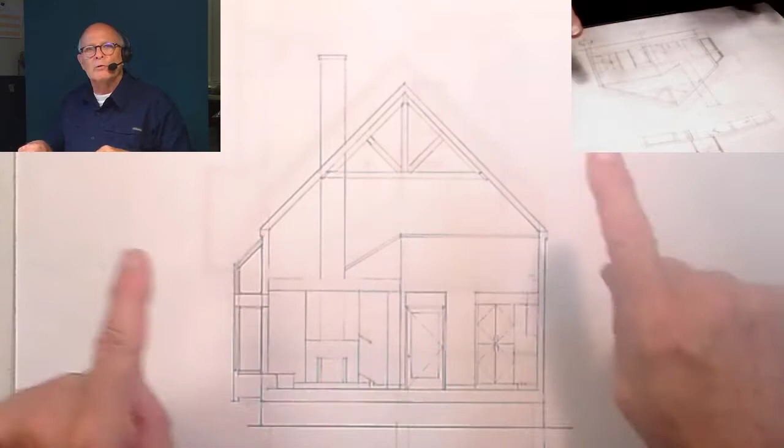So having said that, we're going to be using two drawings that we've already done. We're going to be working with the section and the 1/4 inch plan that we have already produced. And so this is, as mentioned, positive information that we need to use to complete the assignment. And simply bear in mind that these are orthographic projections and they are multi-view drawings. It takes multiple views of the same thing to describe the entire thing. So as a result, we're going to be using the section that we generated last week and the ground floor plan that we did the week before.

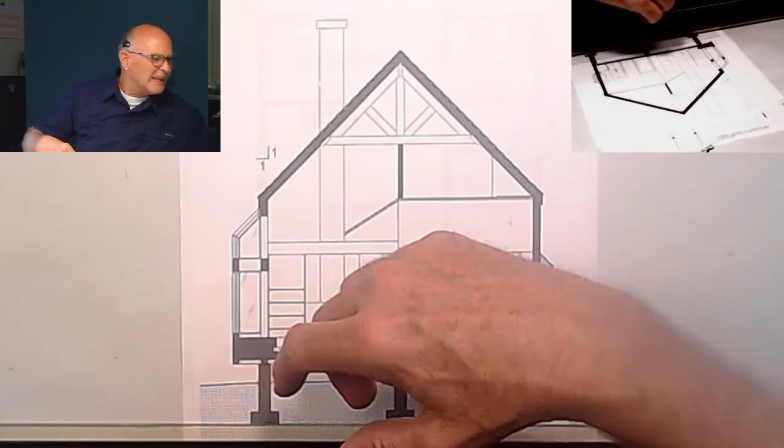So keep those available. Now for this exercise, I'm going to be using this because it's a little easier to see with the camera and so on. But one of the things I wanted you to observe is that in the setup that I have here, I have already placed my floor plan with this orientation. Now that orientation is that the solarium's on the left side and the porch is, obviously, here. The double windows are on the right. So make sure that you keep the correct orientation or you'll be drawing the wrong side, and you don't want to do that.

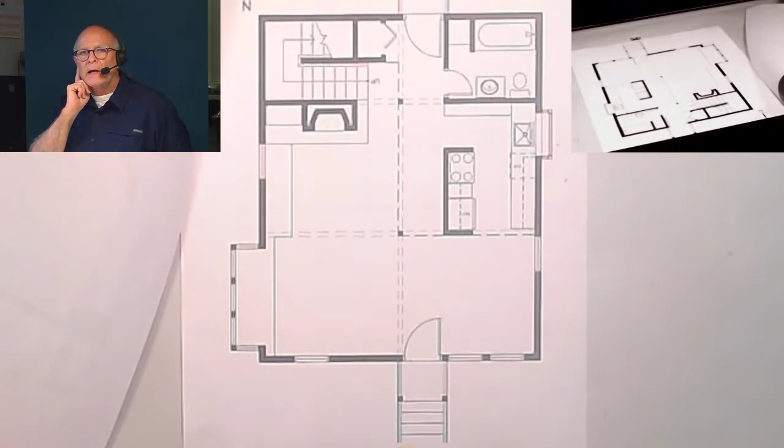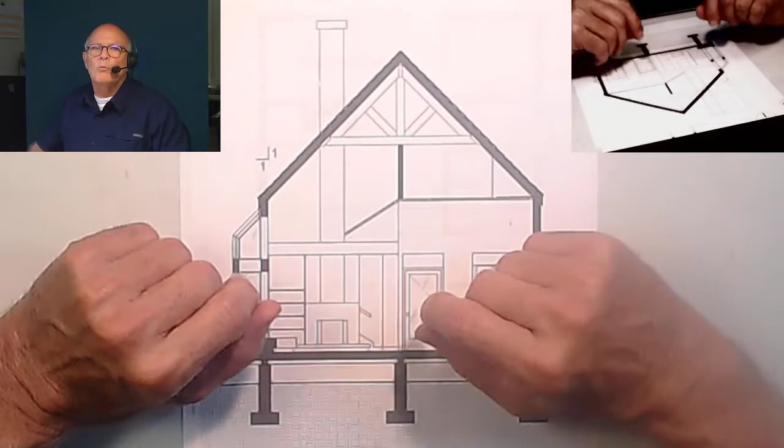So the other thing I want you to know is that based upon this information, we can start pretty readily with the concepts necessary for building an exterior elevation. And that is, we need the floor plan information to give us boundaries, left and right generally, and we need the section information to give us those heights. And with that, we can create kind of a building boundary line that defines the exterior profile of the building. And so that's one of the first things we do.

Then after that, we refer to each sheet very specifically for the features that have to do with its placement left and right off the plan, and the sections and the reference information here for the relative heights. And so that information comes from previously established information. So we're really just tooling information that we already have, and therefore we should be able to borrow that information and project it forward with these new drawings.

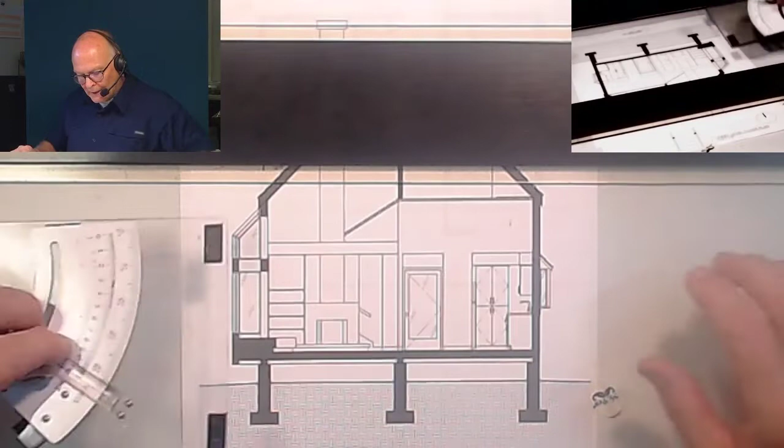So having said that, we want to use the section first. And so as we do that, please take a minute and, as I've done here, tape down the ground floor plan and then tape on top of it the section, making certain that the exterior lines line up with the exterior lines of the plan below. Okay, this should all be, again, a review or a continuation from last week, so nothing new here. So once you have those lined up, and I'm just going to check for square, I'm looking pretty good there. I'm going to say we're good, and I'm going to tape us down.

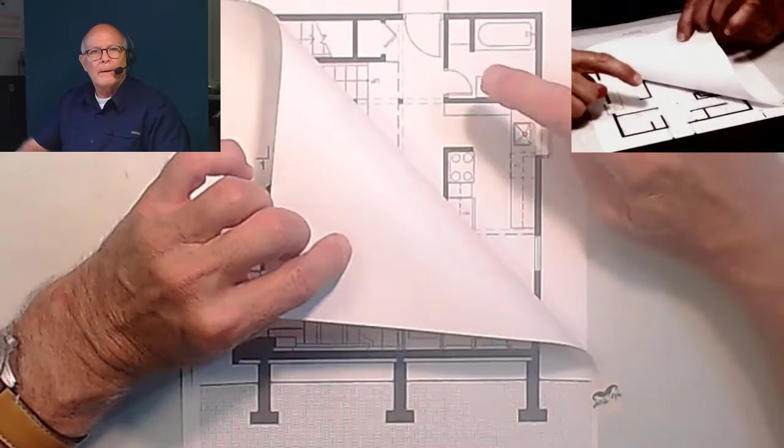Now, what that has provided us with is, if you look close, and you're going to have trouble seeing it there, but on your vellum it should be very readily apparent what is going on underneath because of the transparency of the media, the vellum drawing itself. So as a result, do think in terms of layers and referring back and forth to things. It's kind of helpful, but it takes a little practice. So good luck with that as we go about setting up the drawing.

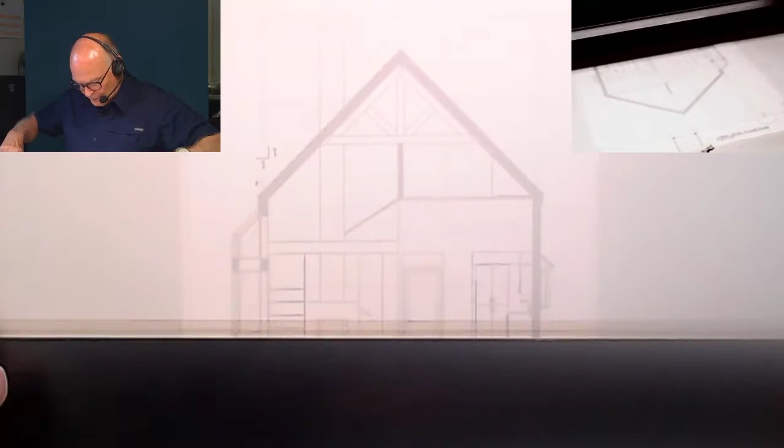Now, in this particular case, I'm going to set up the vellum sheet here so that my section is principally in the middle. Now remember, it's a rough out and you can finish it and make it look great later, but I don't want it drifting off the sheet too far. So I'm going to take time to make sure that it's dressed down and taped in the right location and that it's lined up properly so that the drawing will be easier to complete.

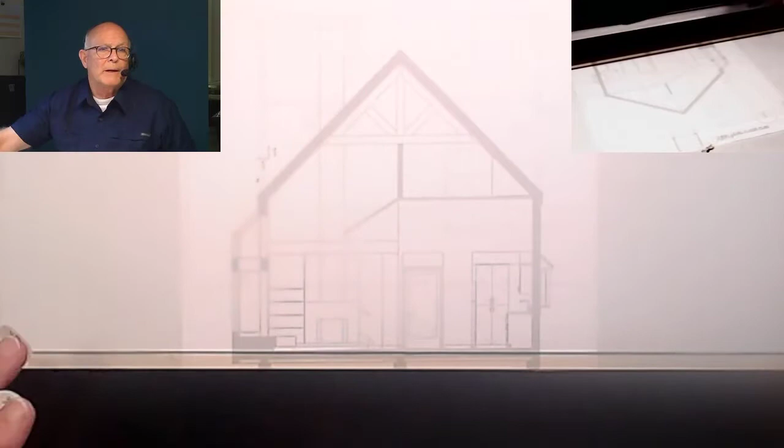Okay, so please take a minute and get yourself situated there, and I'm going to go ahead and start with some instructions here. The very first thing that we need to do is to establish those boundaries, like I said. And the great thing about the section you cut is that it automatically has given you a profile of one of the two elevations. So we're going to start there. Might as well start with the easy stuff and then see where it takes us from there.

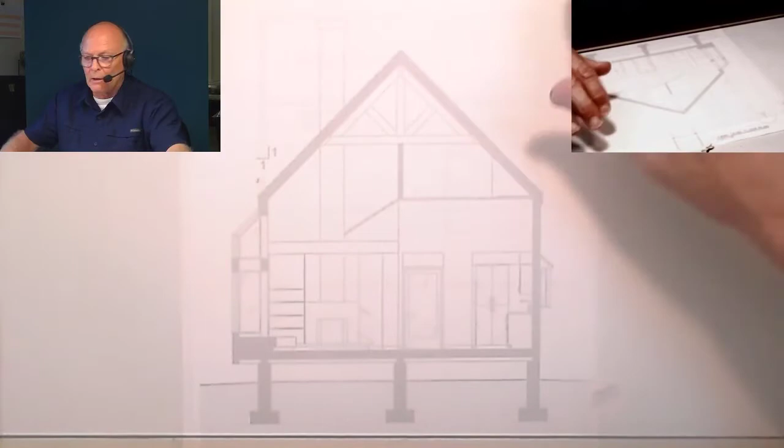So as we do that, the idea is that we have the section taped down. We're just going to trace the outline of it, okay? We don't want any of the inside lines. We can't see that. This is an exterior elevation, so really nothing inside the building will be visible, only exterior elements. So the easiest way to establish a boundary is simply just trace the profile of what you've got so far. So I'm going to do that quickly, so that you can see what we have to do here.

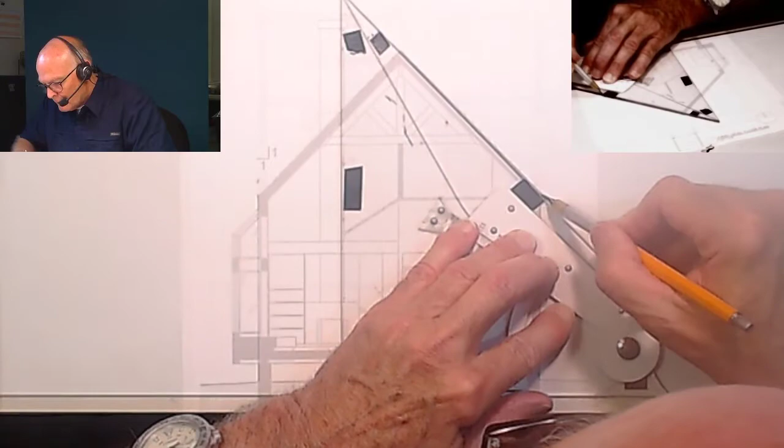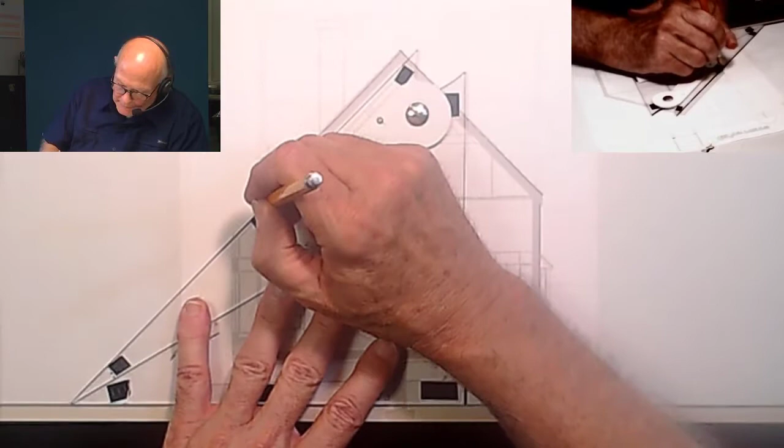And I'm going to do it rather light because you can do this. It's just not that technical. Okay, so I'm going to do this in such a way that you could see what it is we're aiming for here. Okay. And I'm going to go ahead and put in the profile of the solarium just for the time being. And then additionally, I'm going to go ahead and put in the ground line.

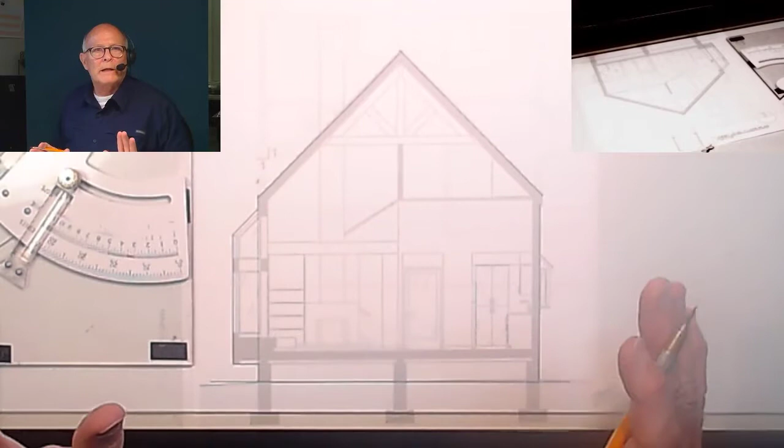Now, if you see my line's a little bit off here, it's because the copy underneath stretched. That happens when you run them through a photocopier machine. They're not a perfect copy. They tweak a little bit, but I know what I need to have here. And you're working off original work, so you shouldn't have that same problem. So as a result, we should be able to see pretty readily what's required for the profile of this building.

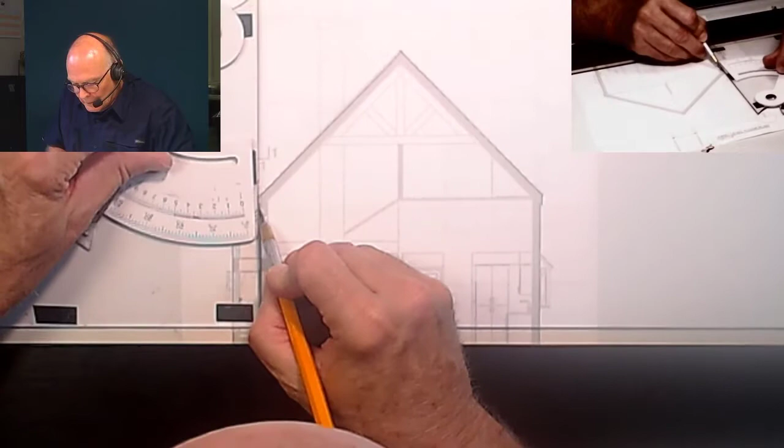And I think we're there. Okay, I didn't put in the chimney yet. We'll do that a little bit later. But you can see it's the basic house form. Instead of redrawing it and recalculating, going through all that stuff we did last week, we're relying on last week's work to provide us with this week's drawing. Now, the next drawing will be relying on this drawing to take us to the next drawing. But let's start with the idea that within this envelope that we've created, we have the basic form. And we could come back to this at any time.

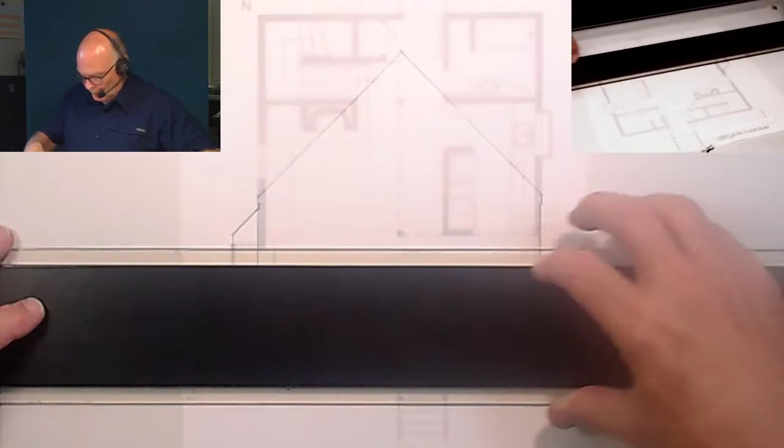At this stage of the game, I'm much more interested in what's going on with the plan below. Now, for that reason, I'm going to remove my section because it was there to give me a profile. That was really what I was trying to achieve with this. And for the next few minutes, I'm going to be relying much more heavily upon the floor plan and the reference sheet. So I'm going to pull that off and remove that. Oh, there's my floor plan. Okay, so hopefully you can see that much better. And the methodology we're going to talk about here is going to be repeatable in future lessons, not just this one, but down the road.

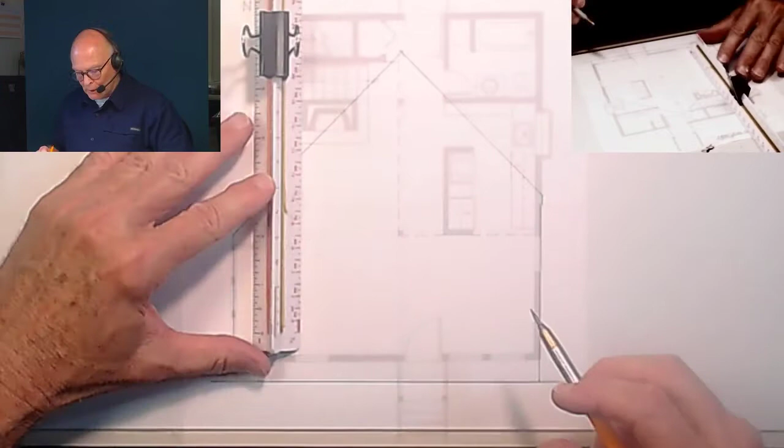So first thing I want you to understand is that we have the baseline. That's the outside. That's not the floor. If you remember, the floor is 3 feet above the ground line. So we're going to go ahead and mark that 1, 2, 3. And we're going to put in the finished floor line. That's important. The reason is all of our features will be measured from our information sheet, AFF, above finished floor. That means we're going to measure above the finished floor to find that height.

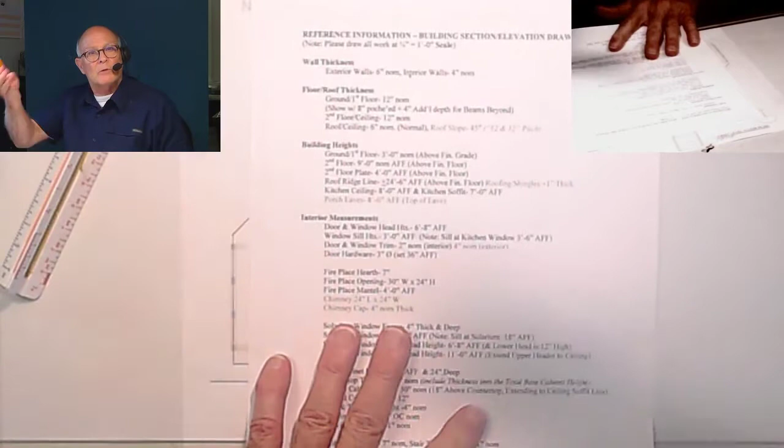So here's our building profile. Here's the lineup of the walls to it. So as you can see, we're on the outside of the wall, we're on the outside of the wall, and we're on the outside of the roof. We came down, put in the ground line, but this line right here is an interior measurement line, and it's going to help us stay consistent. I'm going to make a note. I'm going to write the letters FF on there so I don't forget, so I don't start drawing using the wrong measurement.

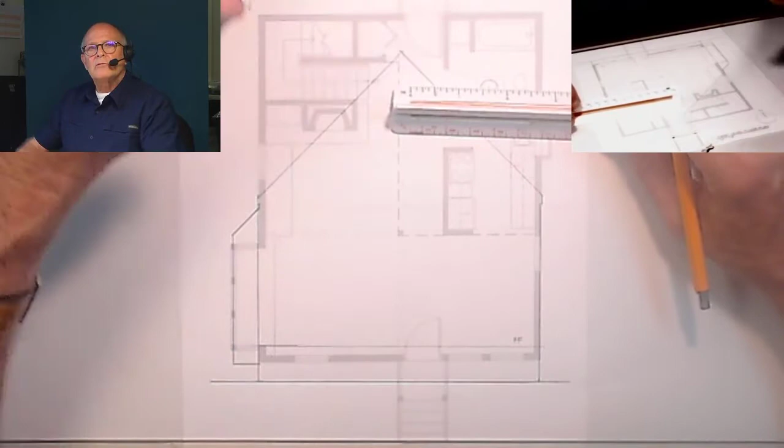Okay, so this part of the process is where we're going to use the information that's on the floor plan now, and we're going to transcribe it onto the elevation. It is relatively simple. What we're going to do is look for the major vertical edges or boundaries of those features that are required. So what do I mean by that? Let me point it out. Okay, so if we look at the plan down below, we say there's a window here, a door here, and a window here. Just those features on the front of the house. They're pretty important, so we're going to put them on the drawing first.

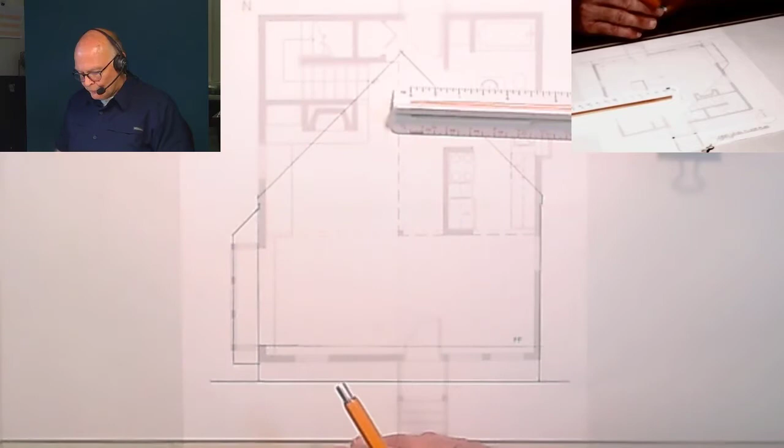So looking at the building boundaries or the building shell or perimeter, we've got a window, door, window. So we're going to find the edges of those. So if you look closely, we have an edge here, right at this edge. We're going to mark it. We're just going to put a little tick mark there. We're going to do the same thing on the other edge of that window opening. Then so on with each one. We're going to come to the door. We're going to do the door. Now remember, it's the opening, not the trim piece.

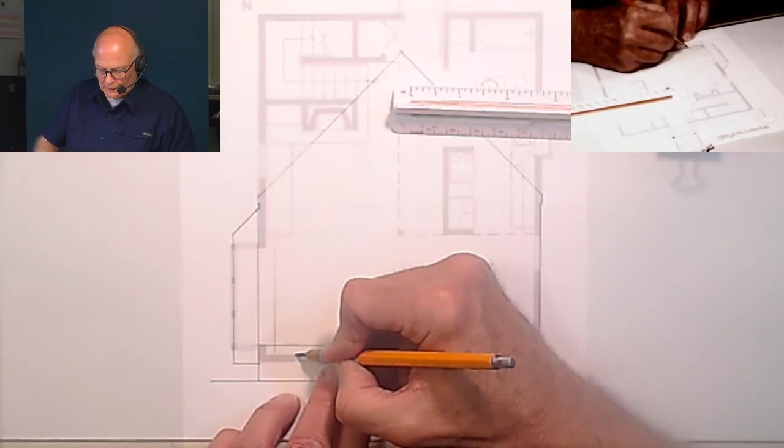It's the clear opening that we're going for right now. So we go to the door opening. Then we come over to the last window and mark it there and there. Now, theoretically, if I had adjusted my plan a little bit, I could be putting them right on the finished floor line. That's a good thing to do. Not necessary, but it's nice. It's a nice way to keep track of things.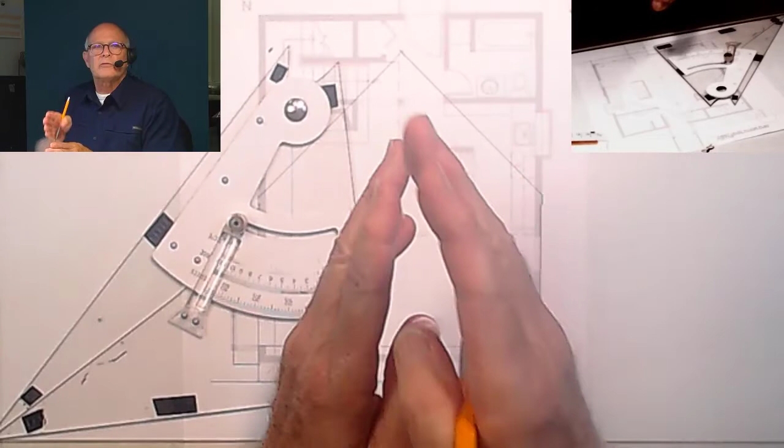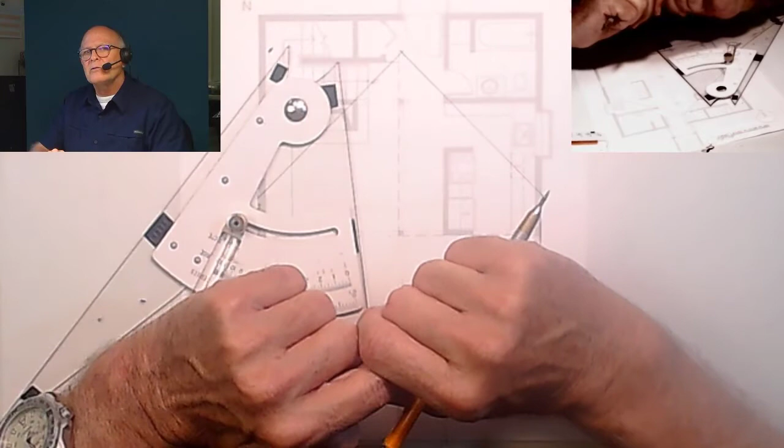So as we do that, now what we're going to do is we're going to use those edges. We've just identified where they are on that elevation. So we're going to draw a vertical line at each one of those from the right going to the left. And we're just going to take it from the finished floor up to, well, we know from our section here that all the doors are at 6 foot 8 inches high. That's a common head height. For most residential design, you try to align the head heights of the doors with the windows. It keeps it from looking a little too chaotic.

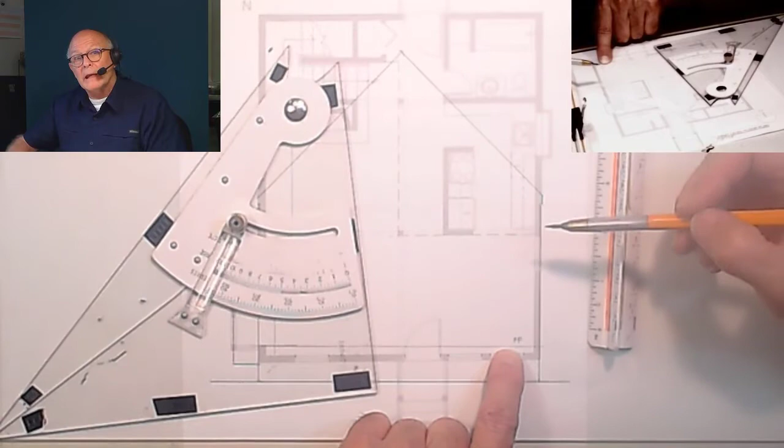So as a result, I'm going to measure up from the finished floor line, 6 foot 8, and we're going to make a mark and a horizontal line very lightly, just so that we can know where our boundaries for those windows are going to go. So I've marked 8 inches, and I'm going up to 6, and making a mark. I'm just going to put a light horizontal line across the drawing. That's my stop point. Now here we go.

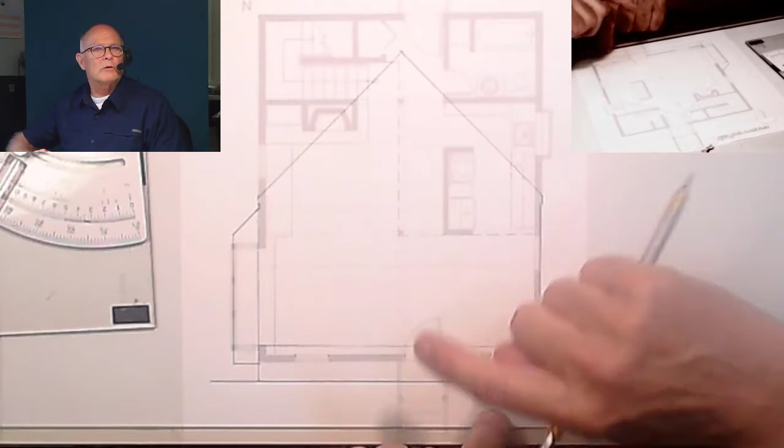So we know the beginning, we know the end. We're just going to draw those lines from the floor plan. We're going to start at the finished floor lightly. We don't need to blast these lines in yet. I'm going to do each edge, and we're going to continue it from the finished floor all the way up to the head height. I'm going to put these in a little bit heavier in just a moment, but for right now, this should be quite adequate. That's good. We'll put this one in.

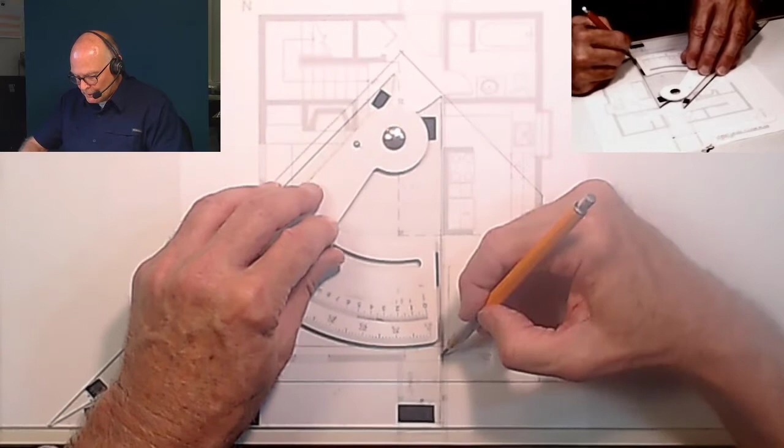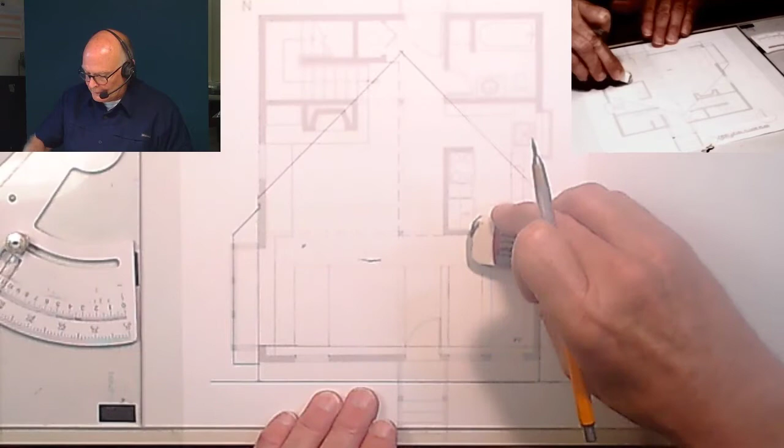And the door, and the last window, and the final edge on the last window. Okay, overshot one of them. We don't need the lines so much now. That's why we put it in kind of light. Okay, so now we can look at our comparisons, and we can say, just for comparison, those windows, they don't go to the floor. They don't go down all the way. They're up some dimension here.

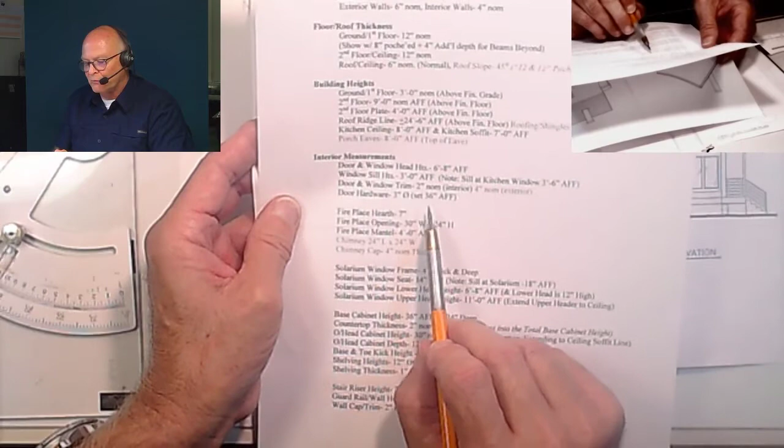So as we look back at our listing here, it says, oh, there we go. So the window sill right here, the window sill is 3 foot 0 inches above finished floor. So we're going to measure up from the finished floor 3 feet 0 inches. And as I mark that, I'm going to put a line lightly across. You could probably skip over the door if you wanted to. But this is going to give me the boundaries of each of these 3 window sets. Now I can erase the lines down below it.

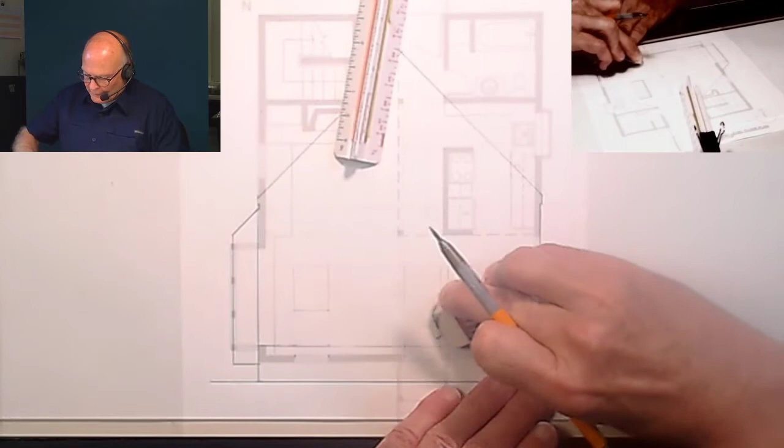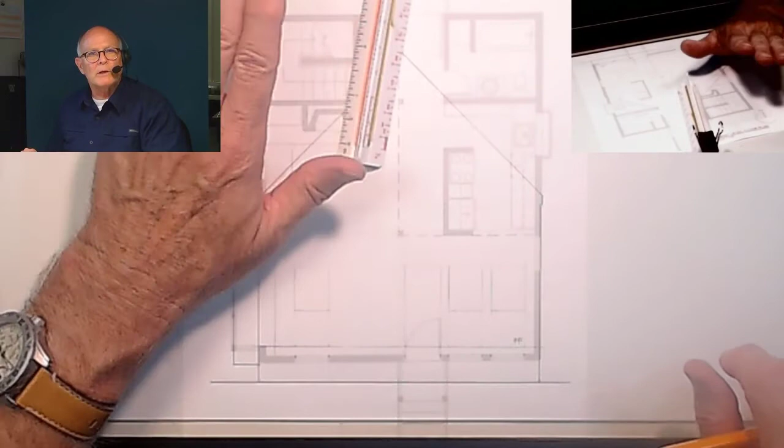And so now we're starting to see that the box openings that are required for this elevation represent window, window, door, window. So not so much different than what we got here. Window, window, door, window. So I'm going to just repeat this really quick here just in case someone didn't quite catch the concept. We used the floor plan to find the placement. So we just marked it on the elevation because our elevation is lined up outside to outside. You already drew the perimeter. It's good to go. That means we can actually mark on this drawing every edge.

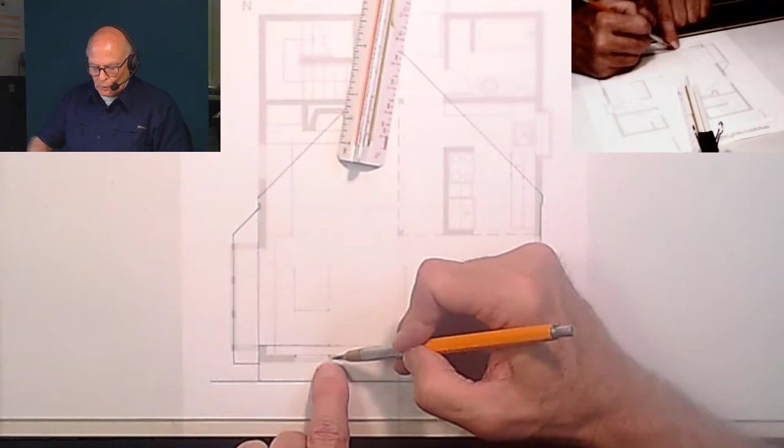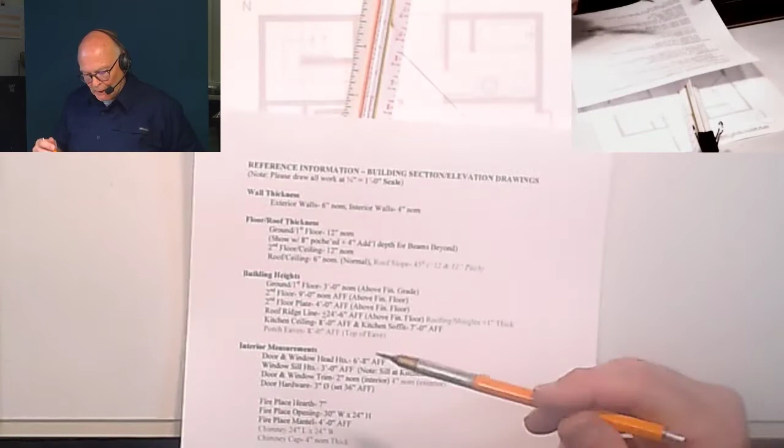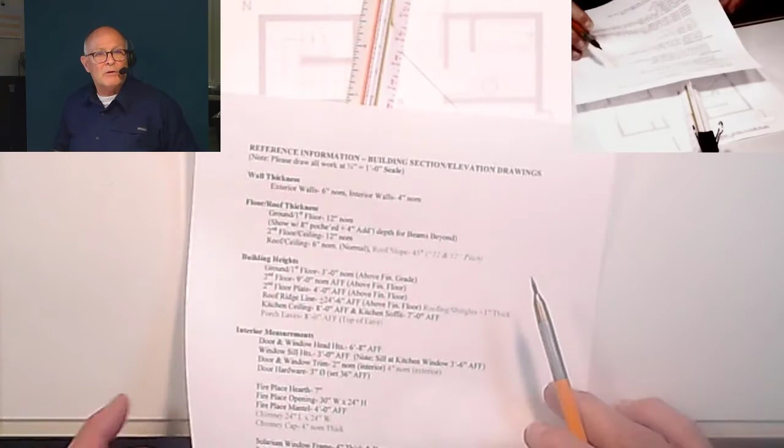So we looked for the edge of the window here. We looked for the edge of the window here, went to the next one, went to the next one here, we went to the edge of the door, other side of the door, edge of window, and we just marked them. Then we projected them up from the finished floor line, from this FF line that we have here, up to a height. What was the height? Well, back to our reference plan here, or the previous section, whichever one you want to use, they should both be correct. It says door and window head heights are 6 foot 8 inches above finished floor. So that's what I marked each of those. Drew a line across all of them, they all line up.

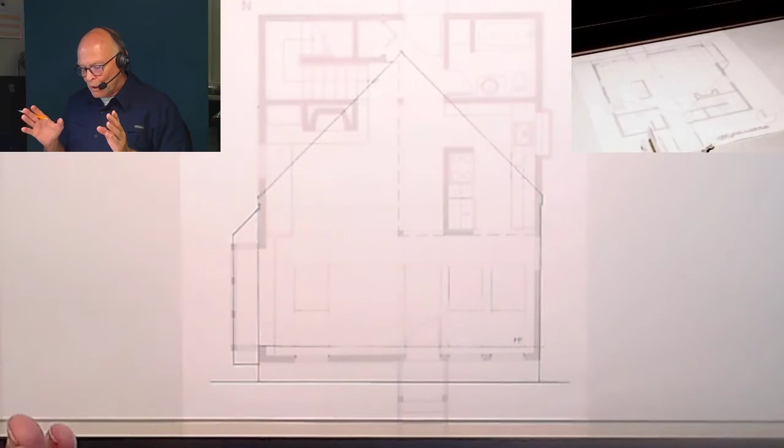So the premise of this, I want you to see a repeat pattern in the procedure. We're going to be doing this again and again throughout this exercise and in future exercises. So it's important to use the plan to find placement and the other information to provide heights. So I'm going to close down this portion of the video demonstration. When we come back, we're going to be working on the porch and the chimney and some of the trim work that's necessary. And so that will make up our time in this next section.